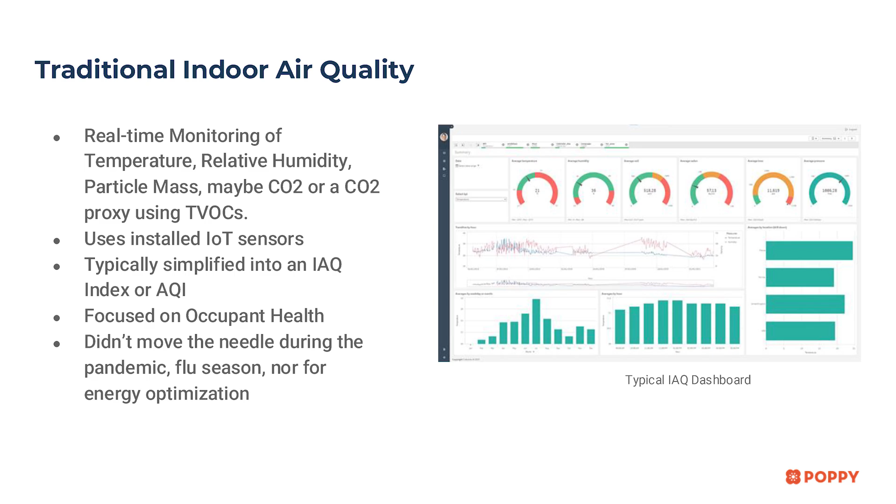What has really been a turning point has been a couple of new standards that have been ratified over the last 12 months that a lot of people aren't aware of. So I'll spend a little bit of time talking about that, a little bit of time about how we've been implementing those techniques in Ontario in lots of different types of buildings and what the results of those have been. But first, quickly to sort of level set everybody on indoor air quality.

And I know this is probably basics for many of you, but just so we're all speaking from the same page, indoor air quality has traditionally been measuring the same couple of things. There's lots of different sensors available out there, ranging from very consumer grade sensors that you can buy off Amazon to higher grade, higher quality sensors from specialized providers that get installed in your building, get hooked up to your local internet or Wi-Fi, and basically have continuous monitoring of the same couple of things: temperature, relative humidity, PM, or essentially the relative abundance of particles at different sizes. And then depending on the sensor, CO2, or some sort of proxy that measures CO2 using VOCs.

This is an example dashboard that you would typically see if you have an installed IAQ system, say in a commercial building, and you can monitor how all the various parts of the building are performing at any point in time. Typically, the scores for all of those different measures are aggregated into some sort of simplified index or air quality index. And the goal here is primarily around occupant health, as you can imagine.

The challenge when we've been talking to people, especially over the last 5 years, is that indoor air quality is great if you don't have anything else to know about your building, but it falls short in a couple of different areas. And so this was really one of the reasons why there's a lot of work with a lot of standards bodies to try and evolve what we want to measure when it comes to indoor air, so that it's more relevant to some of the largest threats to buildings and occupants.

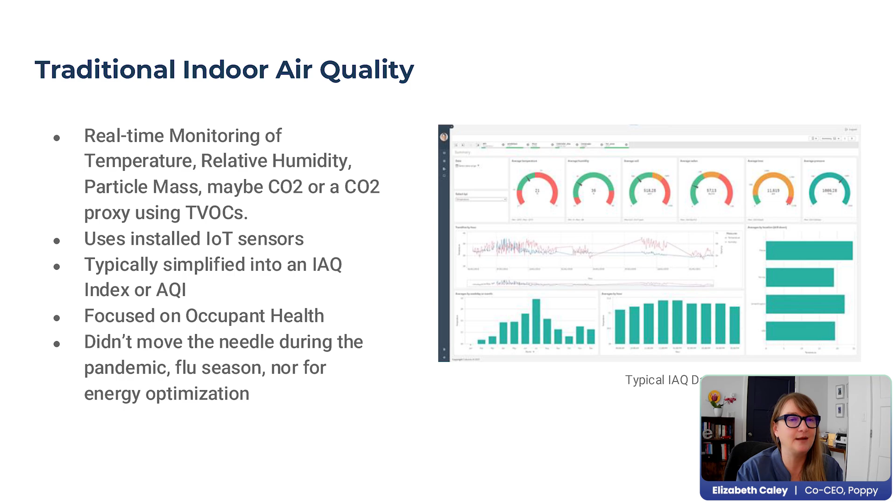So the great news is there have been some amazing breakthroughs, both on the technology side and on the standards side, that help fill in those gaps and are really exciting to talk about. The first one is a new standard that came out from ASHRAE, which is the international standards body of engineers and experts that really come together and, through a very consultative process, figure out ways that we want to manage our buildings. So 62.1 might be an ASHRAE standard that you're familiar with. It essentially dictates how much CO2 is okay in a given indoor space.

ASHRAE released standard 241 last year, and this was basically because the White House asked the group to do this to address those couple of gaps that we had talked about. So specifically about infection control when there's people who are sick in the building with things that can be transmitted through the air. And then very importantly, they actually built the standard so that it's based on occupancy. So how much effective clean air a building requires under a standard like 241 changes depending on how many people are in the building. And that could be dynamic, if you have an occupancy sensor, you know exactly how many people are in different parts of the building at any point in time.

But that can also just be using the standard to say, the peak for this classroom or this courthouse or this floor of this office building is X number of people. And so we're going to use the standard to figure out how much effective clean air is needed in that building or in that particular part of the building. So 241 was a great breakthrough. It's becoming much better understood. There's a lot of content out there that will help you understand it in detail.

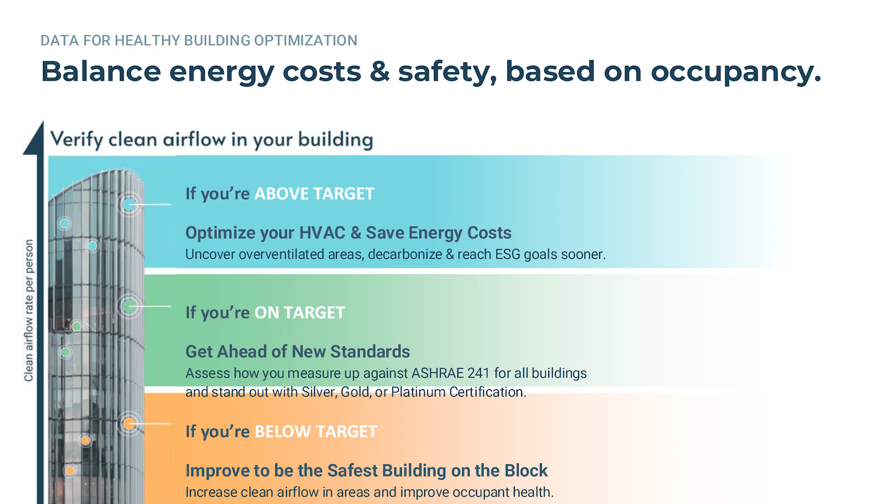So what does it mean when you actually get the results from a 241 test, like the Appendix C test? Typically what we find, and we've done tens of thousands of these tests now all over the world, but a lot of them in Ontario, a small percentage of them are actually on target. So for the number of people in that space, and the guidance based on what type of space it is, we definitely have some parts of buildings that are exactly right on target. Nothing should be done to change those. You just want to monitor it on an ongoing basis and make sure that doesn't change.

Typically what we find, though, is that parts of buildings are in one of the other two categories here. Below target is essentially that there's not enough effective clean air reaching that part of the space to support the number of people that are typically in that space. And so we call that below target. And there's a lot of different great solutions out there that can help improve that and make sure that the minimum part of the standard is met.

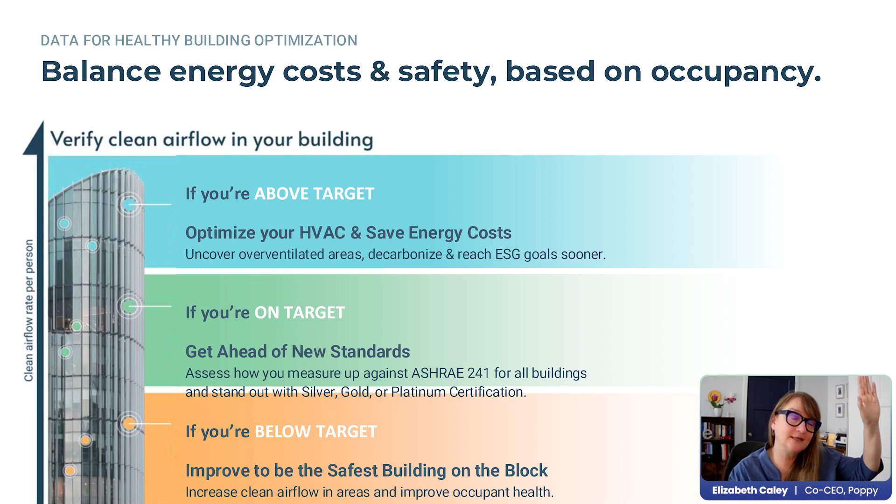Very typically, especially in commercial office buildings, but in lots of different types of buildings, retail and warehouses and all sorts of other buildings, what we find is way more of the space is above target. And those are areas where there's potential energy savings. And with energy savings come cost savings, and those cost savings can then be reapplied to help any of the areas of the building that are below target.

So just a quick snapshot of the kind of data that we're talking about. We've performed not only 1,000 ASHRAE tests, but many tens of thousands now of the tracer particle decay tests, in pretty much every space type you can think of. I think we've done jail cells now. I think we've done almost everything except for an operating room.

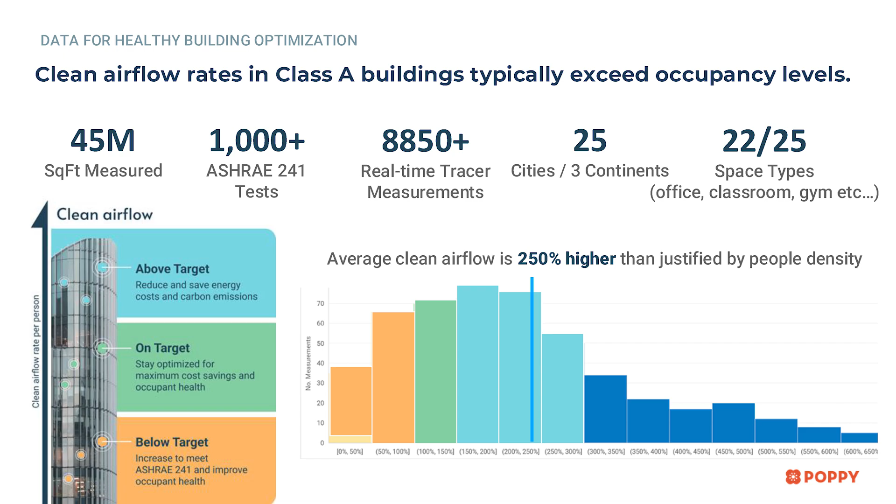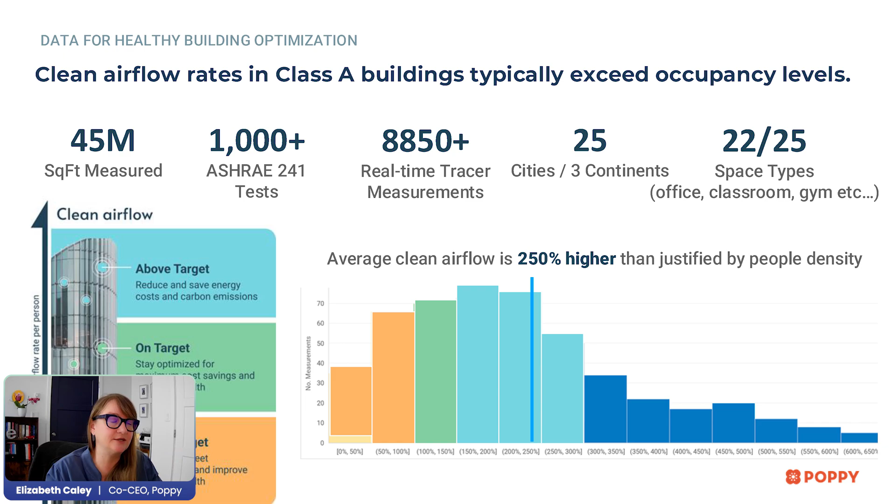And typically what we find, especially in newer buildings, Class A, Class B buildings, is that they're typically 2.5 times above what is needed based on the occupancy being supported in that space at that particular point in time, which makes sense. A lot of the buildings we're occupying are engineered to support a very large number of people, and a lot of buildings, especially office buildings, are operating at a much lower occupancy right now. But the systems have not been adjusted to account for that, and so there's a lot of energy waste.

So here's a very short snapshot of the kind of data that you get once you do a test like this. A very typical building where we tested in 30 different parts of the building. And in this building specifically, I believe this one was in London, Ontario, 77% of the areas tested of those 30 tests were well above what the standard requires.

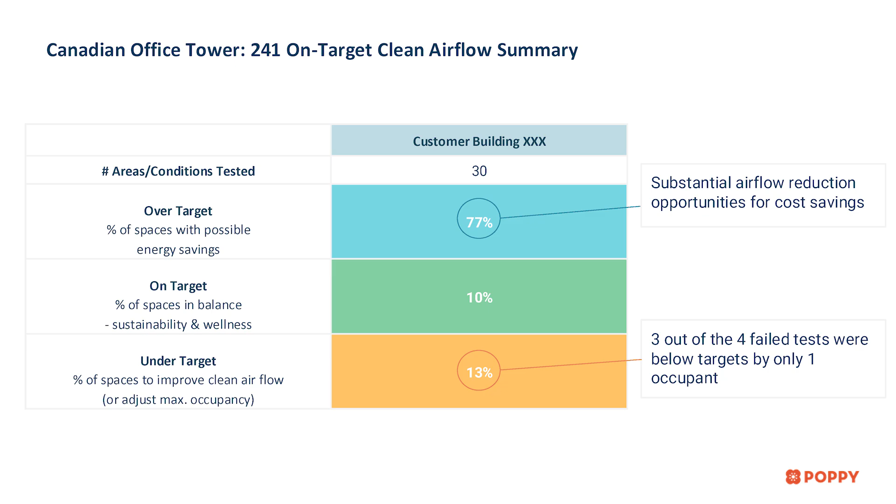And the standard, like I mentioned briefly earlier, depends on how the building is being used or how that part of the building is being used. So there's more clean air required, for example, if it's a fitness center or somewhere where food is being prepared, than if it's a place where people are sitting or doing some of those more regular things.

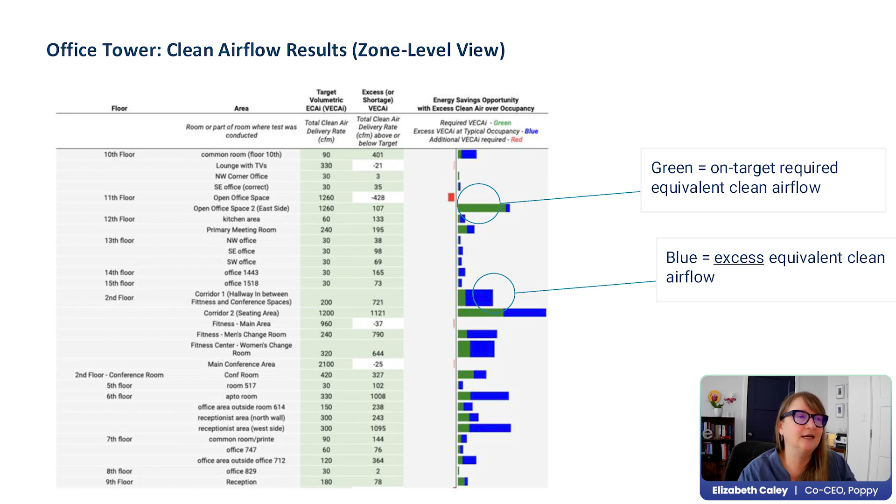And basically those sensors are now collecting data from within that space so that we know exactly how much clean air is being delivered to that particular part of the building. And they're quick tests; once that test is done, it's basically picked up and moved to a different part of the building. And typically in a day or two, even very large buildings, we have all of this data to provide, and nobody has to install anything. Nobody has to go through information like security checks because it's an entirely self-contained system.

Just one moment. If any of you are like me, you probably have to operate as a door person for your dog every once in a while. Sorry about that.

They were very pleasantly surprised that we found a great ROI and some energy cost savings that they can then apply to parts of the building. Those dollars they could save in their energy bills and apply to some improvements in other parts of the building. And that's sort of the worst case scenario we typically see. And especially in more modern buildings, there's usually a lot of energy savings and money that can be saved.

So up to, I think we had 1,000 metric tons in an office building that was about 450,000 square feet, about $250,000 worth of energy savings for them in a given year. It obviously varies based on your energy rates, your utility bills, et cetera. But this is the kind of analysis that we do, both with our measurement, and we also help organizations analyze their entire portfolios even before we step into the building, to help prioritize which ones might have the highest potential energy savings available to them. And then we focus on those buildings for the initial tests.

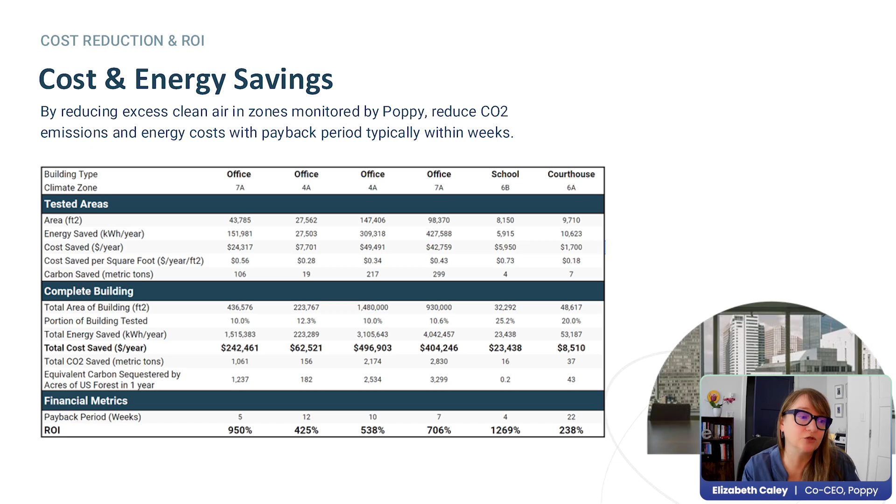So just bringing it back to Ontario and Ontario funding a little bit, there's lots more that I know you're going to hear from the other speakers today, but I wanted to just highlight one example of the Ontario Trillium Foundation, who have capital grants, especially for community spaces. And they have stated many times in the past that improving the clean air within the building is something that they will support, up to $200,000 per year. The next deadline for applications is March next year, and we're very happy to work with any organizations if this is something you're interested in.

What we can do is come in and actually do a baseline assessment of the building and give you some great quantifiable information of where improvements might be needed and/or where energy might be saved using our data. Then typically we also go in once adjustments are made, we'll do another set of tests and show people that they've actually achieved their goals.

So we're the numbers people. We don't actually provide the adjustments or the solutions that would be implemented, but we are definitely the folks that will show you what areas need attention and by how much, make recommendations, and then help you verify that those goals have been achieved.

And last, but certainly not least, this is not a grant that's available in Ontario, but it is sort of a call to action. The Ontario Clean Indoor Air Act is something that is being called for by many organizations. I'm just highlighting the Ontario Society of Professional Engineers.

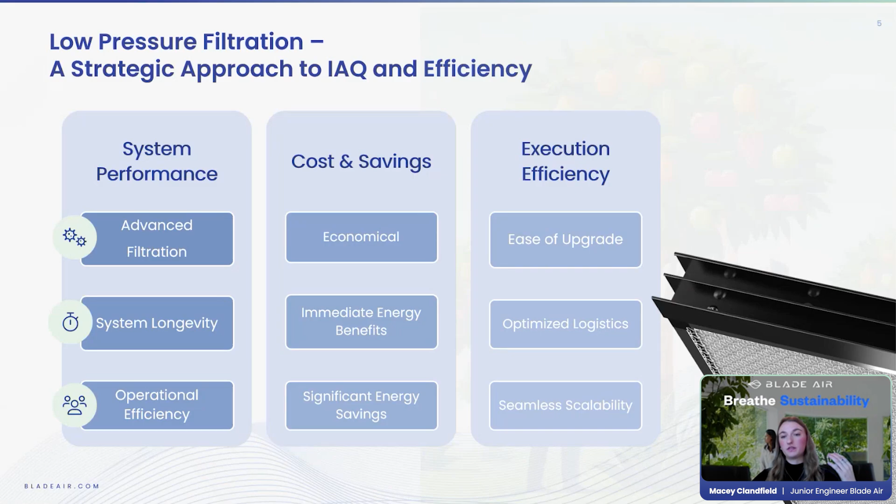The last thing just to quickly touch upon is the execution efficiency. So again, compared to other types of upgrades, for example, installing a variable frequency drive in your HVAC system often involves significant cost, but also significant downtime. Whereas if you're using a filter that's designed for zero retrofitting, you have minimal operational disruption. Also meaning that you should be able to replace your existing pleated filters with these zero retrofit filters, regardless of the HVAC system age, type, or size.

I just want to take a moment to come back to this idea of when we keep talking about low pressure drop filtration resulting in energy savings. What are the key contributors to this overall reduction of energy usage? When you put in a lower pressure drop filter, essentially that means the fan pushing the air through your building doesn't need to work as hard to push the air through the system. So that's where you get your reduced fan power requirements.

And then building on that, you can also get shorter fan run times. And this is because, again, from that reduced resistance across the filter, the HVAC system can actually achieve the required airflow of the building more quickly, so the fans can power off sooner or just lower operational cycles.

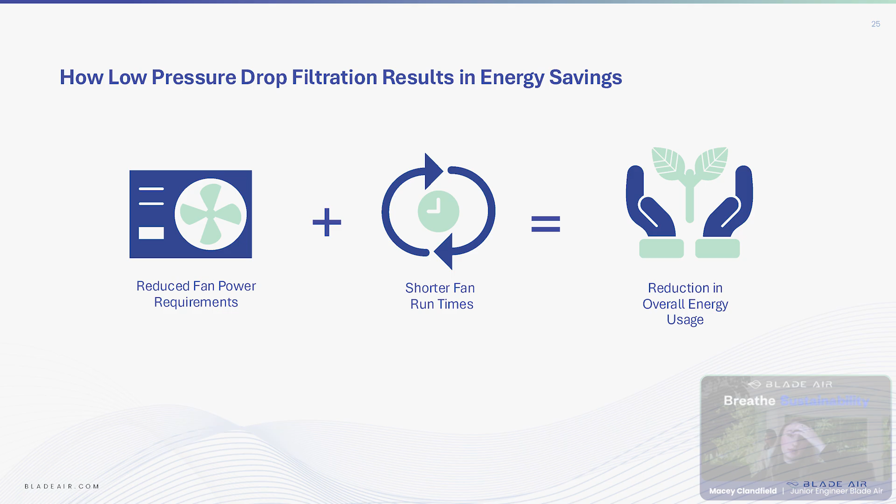And also in Ontario, often a lot of these programs allow for what is called the stacking of rebates. So this means that for one specific project, there's the possibility to get funding from multiple different sources. And I know it may seem like a long process, but it really isn't. And I'm sure Aquila will demonstrate and go into the weeds a bit more about calculating energy savings and navigating this whole process to maximize your funding.

Now getting into a case study. So Blade Air is actually very proud to have worked on this project in collaboration with one of Canada's leading national banks. And I'm excited to share this story with you all today. So where does the story begin? The story begins when this national bank wanted two things. First of all, they wanted to improve their indoor air quality, but they also wanted a sustainability initiative. And they knew that they couldn't achieve this with their current filters, which were standard MERV 8 pleated filters.

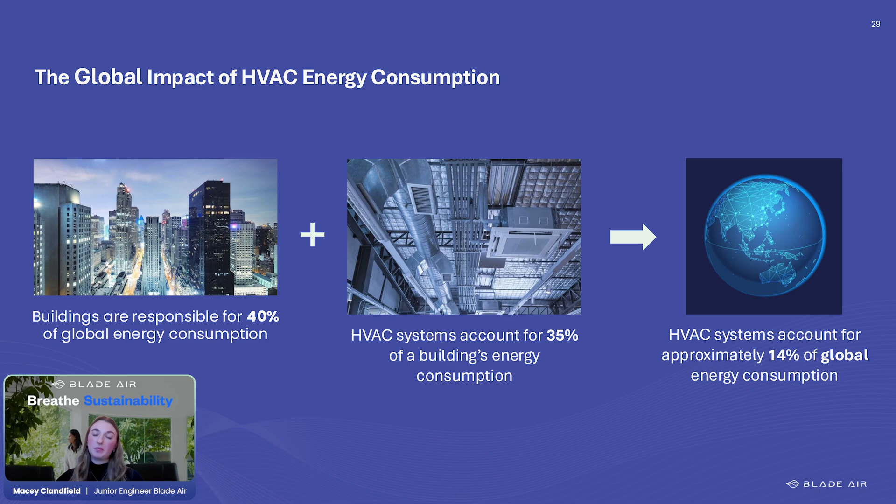So I just want to share and emphasize this information to show that leveraging grants helps make sustainability affordable, but also that implementing these low pressure filtration and energy efficient upgrades will actually allow you to have a meaningful impact in helping reduce this energy consumption.

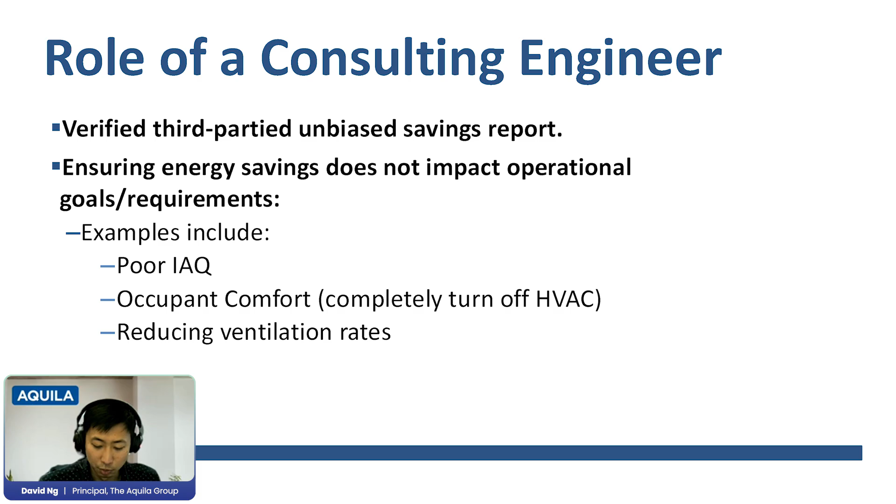Another reason to use an engineer on these types of energy savings projects, and EC talked about that as well in our presentation, which is great, is that you want to save energy, but you don't want to impact operational goals and requirements. So we're talking about poor indoor air quality, occupant comfort. You don't want to do a project that saves energy but is at the detriment of your occupants or the building, reducing ventilation rates below what they should be, or impacting indoor air quality. That's not what these projects are for. You want to save energy, but in the right way.

At the core, in incentive savings, and this has been consistent over many decades, they're essentially incentivizing or paying you the amount of your first year savings. They recently changed the incentive rate from 10 cents to 13 cents. It doesn't quite meet what your electricity rate is right now, but that essentially brought it up closer to your annual average electricity rate.

General application tips. We talked about golden rules: don't start the project before receiving incentive approval. Can't emphasize how many projects I've had that unfortunately got canceled because of that. Of course, there's a number of reasons why things need to get started, but the last thing you want to do is to start the project not knowing you're canceling your incentive.

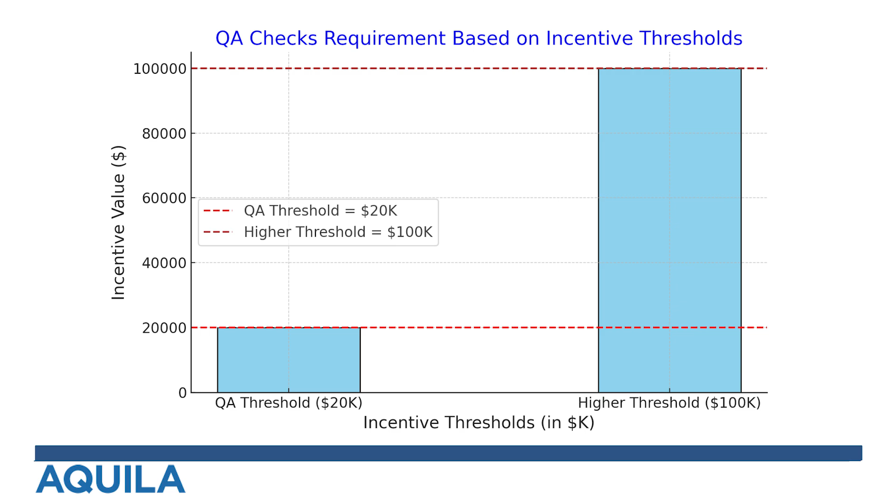And that M&V plan or those initial calculations, that's one of the foundations of IPMVP, which is the governing body of M&V: the more the incentive and the more the project savings, the more rigorous M&V and metering you get into. But as it's smaller, you can do more of an estimate. Under retrofit, there are different thresholds. They're not published, and they do change over time. What we found is that if you're applying for a six-figure incentive, over $100,000, then you get into a very enhanced M&V.

Typically, the reviewer comes to site. There's a lot of documentation required. And then if you're below $20,000, then the M&V requirements are very, very basic. So one of the strategies we have is, if you're at those thresholds, let's say you are estimating $105,000 of incentives, then we'll have the conversation. Maybe you want to drop that down to 99,000, just to make your life a little bit easier.

And even though you're applying for $10,000 worth less of incentives, you may save on $10,000 worth of measurement and verification or quality assurance requirements. So you want to be cautious about those thresholds, and that's a discussion typically you'll have with your applicant representative or your consulting engineer. Maybe I'll pass that back to you, Ava.

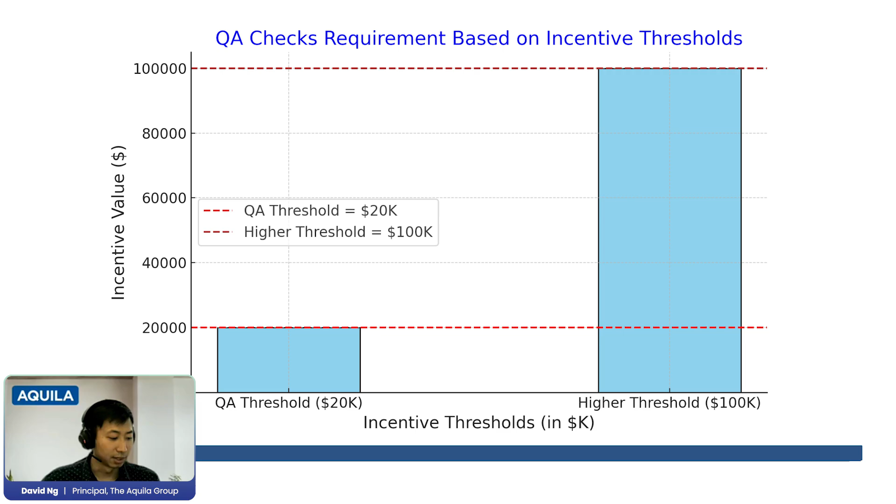Thanks so much. Thank you again for providing some practical step-by-step guidance on calculating energy savings and navigating the grant process, David. Now that we've heard from all of our panelists, I want to bring everything together. As we close this presentation portion of today's session, I hope that you've all gained actionable strategies to accelerate your ESG and sustainability goals. We've explored clean air intelligence, advanced filtration, and grant funding, and how these three areas can work together to optimize building performance, enhance indoor air quality, and reduce energy costs. So remember that the tools and resources are out there, even though it can be a little overwhelming, but together with strategy and synergy, we can tackle these challenges and make a tangible impact on our built environment.